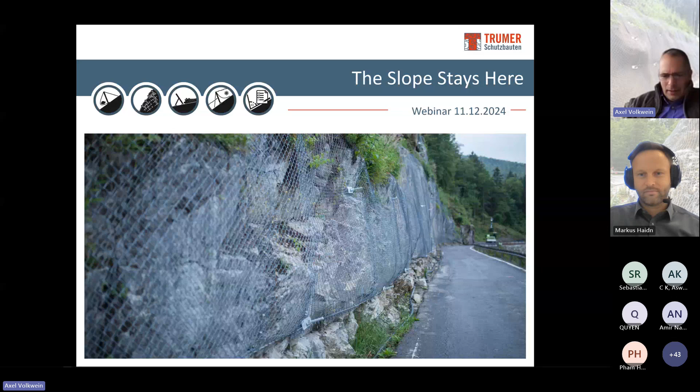Thank you, Markus, for the introduction. I think every participant in this webinar knows that an unstable steep slope can be secured by nails and flexible facings. Very often we can see the stabilization works also with shotcrete on the slope. But in our case, we are using the steel mesh. This is much more favorable in terms of greening, water flows, and it's also a very sustainable way in slope protection. So here we can see some example pictures.

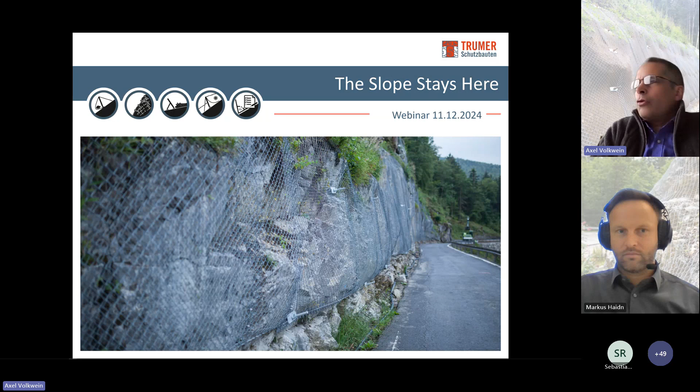Here we are facing a rock face, here it's a more grassy slope that has to be protected. Another example here, more a rocky face.

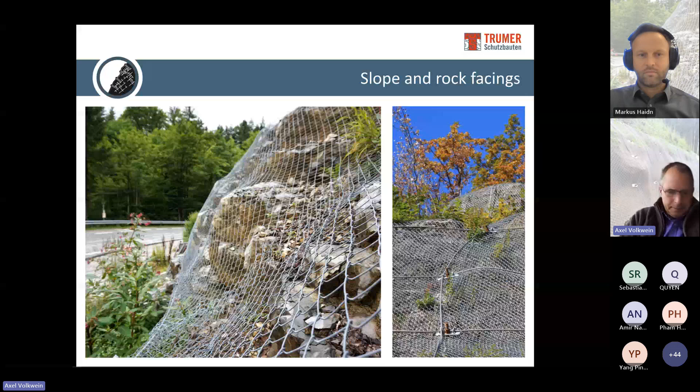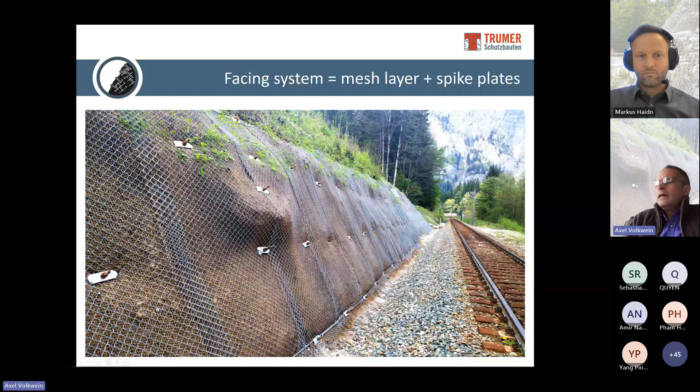What you can see is that these installations are usually a combination of a mesh and some anchor plates that are connected to the nails that go into the ground. So this is a system - we need a combination of a mesh and certain plates that interact together and guarantee that everything is stable. The mesh itself is delivered on rolls with lengths up to 30 meters and widths of up to 4 meters. You can also have smaller rolls, but usually these are the typical sizes of the system.

To secure the mesh also at the borders or edges of the slope, we combine our plates with certain mesh ropes, steel ropes, that keep the mesh on the slope.

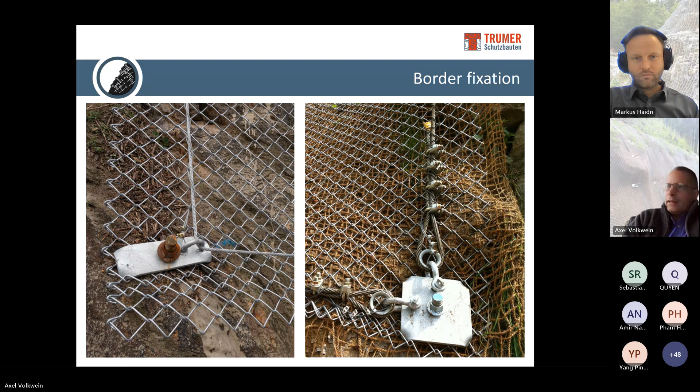The question is, we are using a product that is a civil engineering product, or for civil protection, and there is now a guideline that defines how we have to test and study or design these meshes.

This guideline came out in June 2016, but the origins are much older. In 2000, almost a quarter of a century, so 24 years ago, there were two civil engineers from Switzerland, called Rüegger and Flum, and they developed a calculation method to design these mesh facings along a slope. Based on these calculations, this European standard came out in 2016.

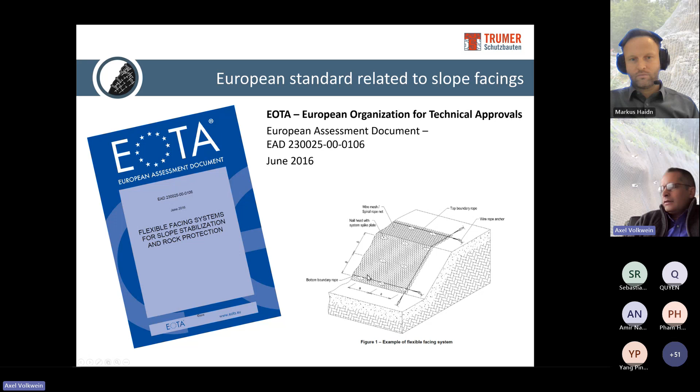So this guideline, you can download it for free from the internet, describes what these products are for. For example, here's an example picture from this guideline showing the slope protection. It also shows what details of a system have to be assessed for an official assessment or CE certificate by the European Union.

We have some geometrical values - this is the number of meshes in transverse and longitudinal directions. We have the mesh width, the height, so clearance of the mesh, so what size of particles can go through it. Then in section 3 of this table, there are relevant values on the strength of the mesh, and we will see afterwards in the webinar a little bit more on these values. This means how strong can I push on the mesh so that it doesn't break through the anchor plate, for example.

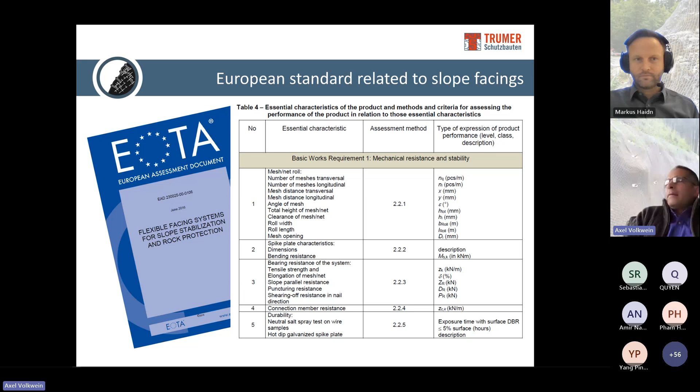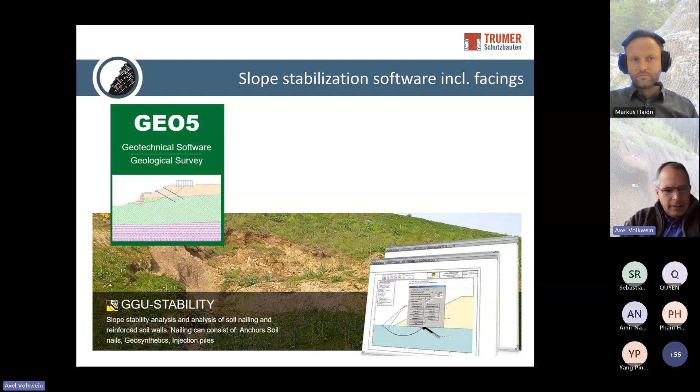To do analysis with these values, there's some commercial software available like Geo5 or GGU Stability - they have already implemented an interface to consider these meshes on the slope. But I think not everybody has a license for these two programs, and many other people are using different software packages like Larix or the things from Rocscience that provide all kinds of proofs for the groundworks, but don't have a special tool for the consideration of mesh facings.

To help these people, we created this free online tool for the design of mesh facings. We call it 'The Slope Stays Here,' meaning we don't let the slope go down. This web page is an open site, so everybody can use it - you don't need any login. The site just uses the calculation method that was introduced by these Swiss engineers 24 years ago. I think it's a good solution in combination if you use this tool with mesh systems that have a valid certification through the EU.

We will go into this tool later. It's very common to use mesh facings on the slope made of high strength steel, but this tool also considers standard meshes that are available in different strengths on the market.

So far, so good, Markus? Yes, okay, I see. Are there any other advantages of this tool?

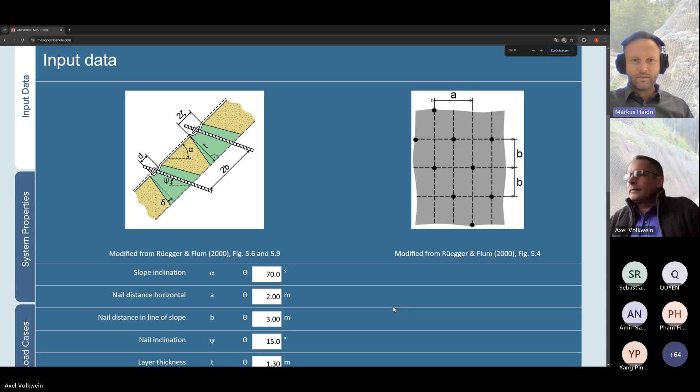So, okay, at the end of every chapter you find a red reset button. If you reset it, all the values you entered will go back to the predefined ones. We don't want to do that right now, we just save and proceed, and then the tool jumps to the next chapter.

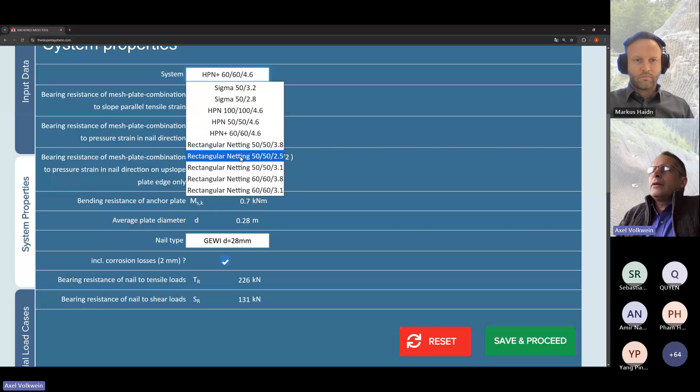And here you can choose the material you want to put on the slope, so you have kind of a catalog here. One mesh is called Sigma, we have HPN, HPN plus, and then rectangular nettings. These are nettings made from normal steel, it's not a high strength steel.

Depending on which system you choose, the characteristic stability values I showed you in the table of the European guideline are selected automatically. So if I change to Sigma, I get different values here, and if I change to HPN plus, I get other values too. These are chosen automatically. We are working on a version where you can also enter your own values in case you have a different combination of material, that will be a task for the next weeks.

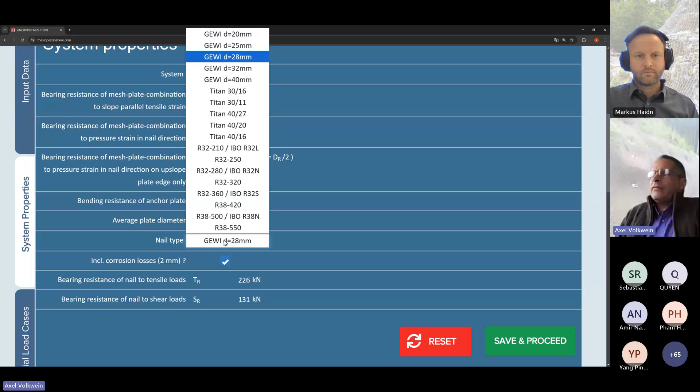You also have a kind of catalog for the different nails available usually on the market, and this catalog will also get its own section where you can enter your own values. You can also choose if you want to consider corrosion losses, so if you unmark this the strength values of the nails change accordingly. Save and proceed to the next chapter.

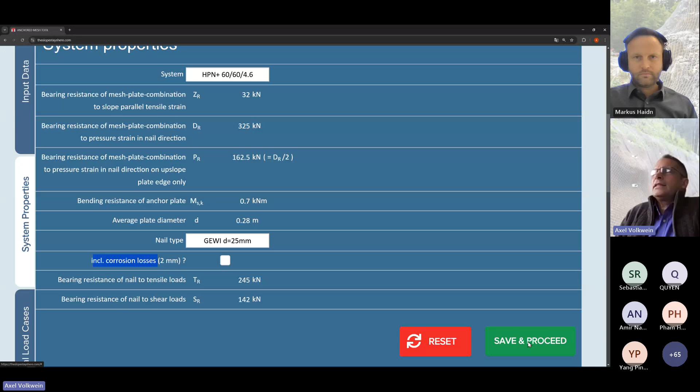And here we come to the section for what we need the mesh for. These are additional load cases that can happen, one is, for example, if I have to consider an earthquake. Earthquakes give an additional acceleration to the slope, and this additional acceleration or load has to be taken by the mesh. Here are predefined values: the Eurocode 8 defines, for example, in horizontal direction an acceleration of 0.175, and in vertical direction 0.085.

Maybe we have to consider earthquake, but we don't have to consider some slope parallel flow. It's a very dry area, we don't expect much water flow, so we can unmark this one here. Now save and proceed.

And now we come to the main part for every design engineer: these are the safety factors. Here we have some information at the top about how the systems work. For example, if I go into the Eurocode 7, the standard for geotechnics, it's written that the safety factor for friction angle is set to 1.0, the safety factor for cohesion is also set to 1.0, and the safety factor of density is set to 1.35.

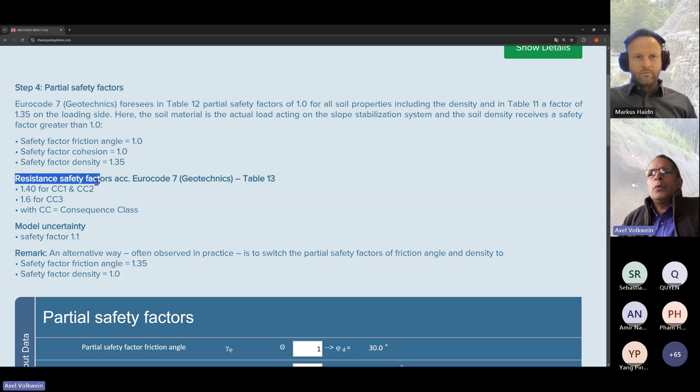In the past, there was also a model uncertainty factor introduced because it's still a mechanical model we use to design the slope. But if you trust the model very much, you can set this to 1.0, so you have no additional safety.

What we realized in the past is that these safety factors very seldom have been used exactly as given by the Eurocode. People just use the safety factor for the friction angle and no safety factor for the density. This is up to you. You have to show, as an engineer, which standard you use and which safety factor to enter.

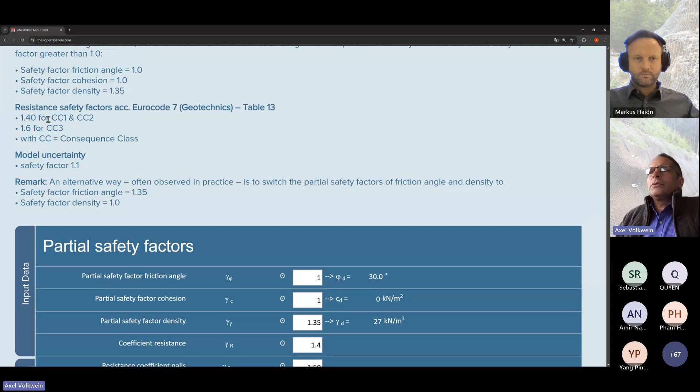We have an example here: no safety factor for the friction angle. Partial factor for the cohesion is also 1, but our cohesion was 0 anyway, so it stays 0. We have a safety factor for the density as given by the Eurocode of 1.35. Resistance coefficient for consequence class 1 and 2 is set to 1.4, and for the nails, in this case, we choose 1.5. Partial safety factor for model uncertainty we can also keep at 1.1.

Now we had entered everything, and the tool has to calculate the loads given by a sliding body that pushes on the mesh at the lower part of one row. But one question: how do you know the geometry of this sliding block?

Oh yeah, thank you very much, very good point. You're fully right.

We have one nail row up here and another nail row down here, and the part in between forms a sliding body. It's not necessary that the whole depth of the unstable layer is affected. Maybe it's only the upper half, and this angle beta might change. We don't know - maybe it's as large as this, covering the whole part. We don't know yet.

So the exact geometry - every single setup could create different forces pushing down on the mesh. This is the reason why we have a computer: it does 1,500 simulations in the background to see which sliding body produces the highest load.

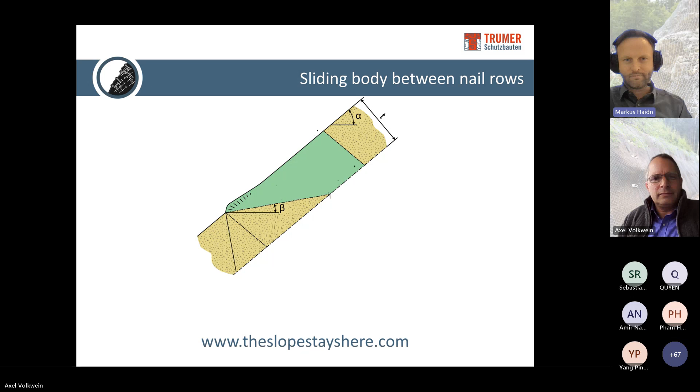Thank you for this question, that was very good to answer.

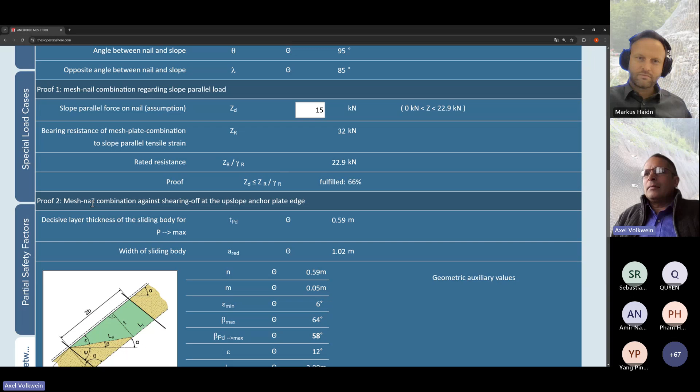All right, this is the point where we come to the calculation itself. We had the sliding body, and we covered the sections up to chapter 4. Now we have 2 remaining sections, 5 and 6, where all the proofs are done. Let me zoom out a little - here you find proof 1 and 2, and here proofs 3, 4, 5.

Wow, that is done by computer - there's quite a lot of verifications, quite a lot of proofs. So do we need all of them? Maybe you can explain them one by one.

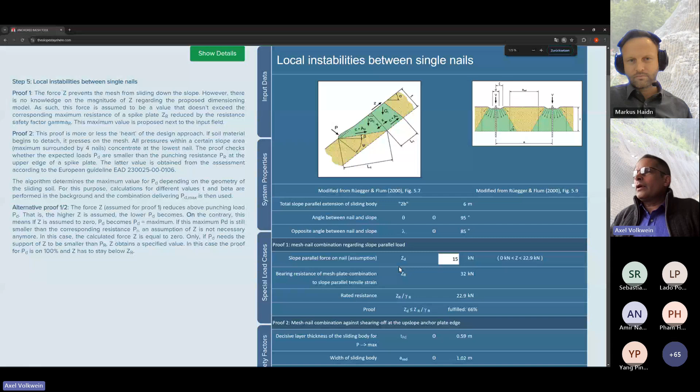Yes, you're right. These are the proofs developed by Swiss engineers some years ago, and there are different modes of failure that can happen. For example, if there's too much tension on the surface, the mesh might fail because there's too much tension at the upper nail. The mesh can be pushed through, or the anchor plate can be pushed through the mesh, and then everything fails. So the different combinations for the mesh, for the plate in combination with the mesh, and for the nails themselves have to be proven separately.

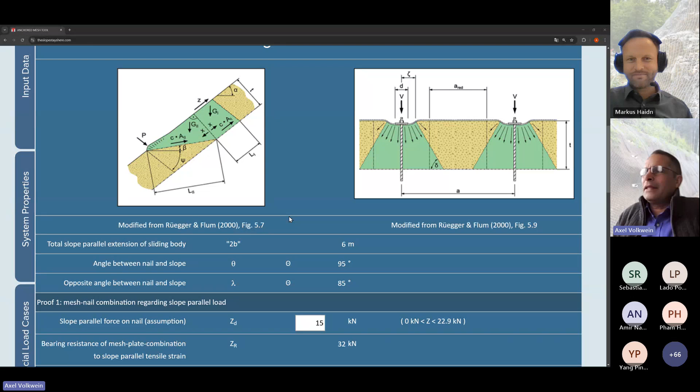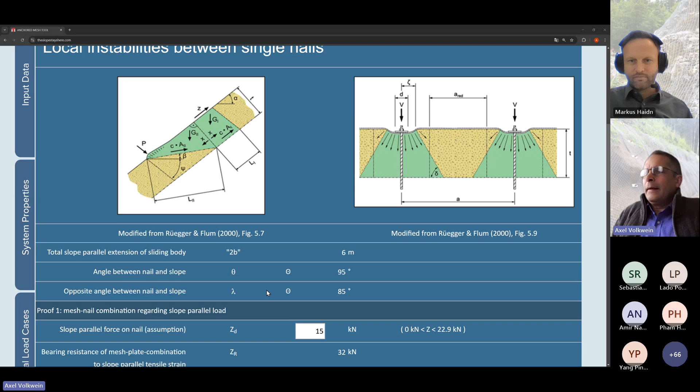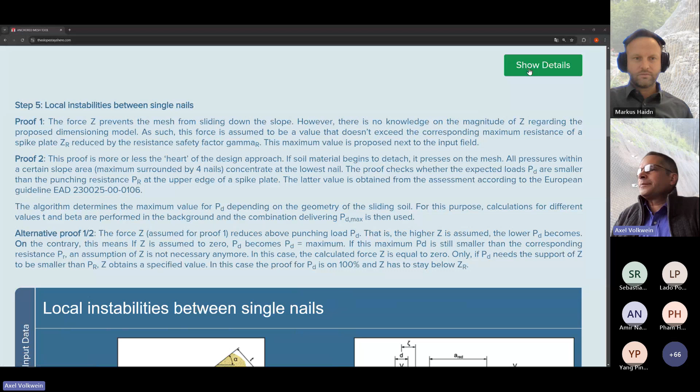For the first proof, we won't go into the details of all these single formulas - you can study them afterwards. If you look at these show details, we have 2 references you can find on the internet, where you can get all the theory also in written form. But you can also contact us to get this information directly.

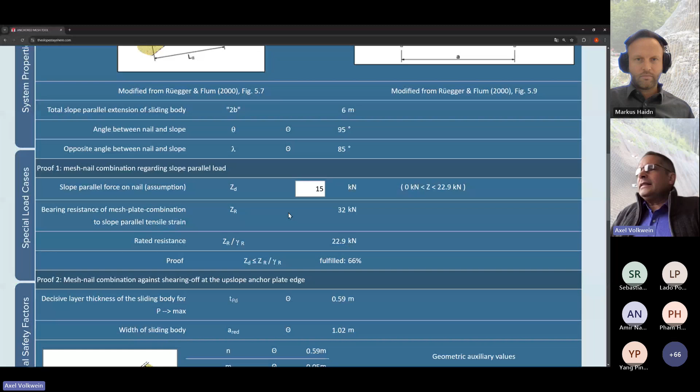The first proof says I have a certain amount of tension that pulls the mesh downward based on pulling on the upper nail.

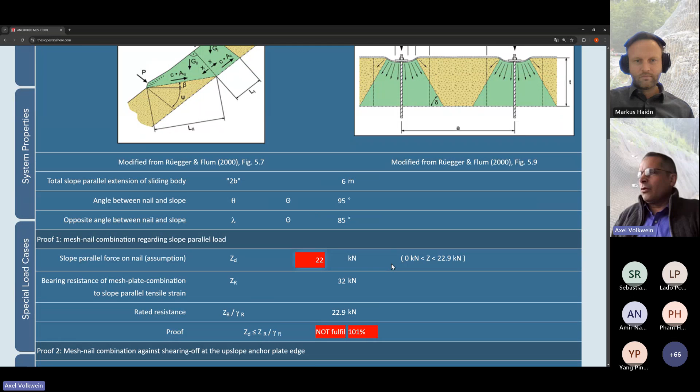Now it's interesting, the design approach says this force has never been measured in the field somehow, so we just assume a value. And then we prove that our assumption is smaller than the maximum resistance of the system. This is kind of strange, we know, but this is a method that works now for 22 years and everybody seems to accept it. You find here in the brackets the maximum value you can enter. For example, if I go to 23, which is higher than the value, it doesn't accept it. It turns to red, so we have to stay below the maximum value. This maximum value is clearly chosen so that it works with the resistance and the given safety factor.

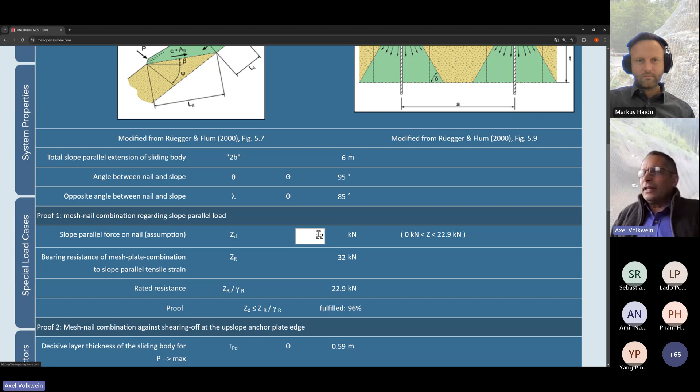So this proof 1 is fulfilled with 96% because we chose a very high value. Really, it sounds strange, we have to assume a value and show that our assumption is right, but this is the procedure given by the European guideline.

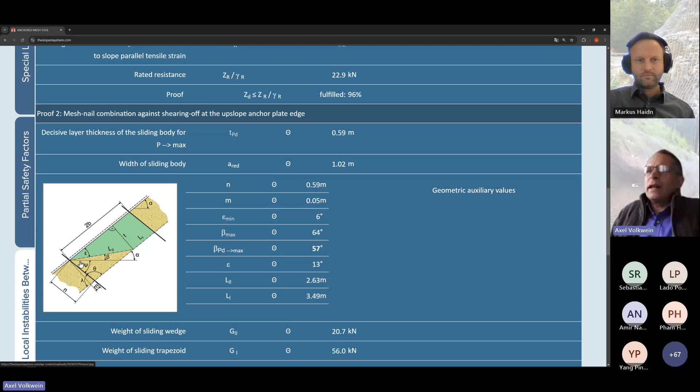The next proof, and this is the main proof, calculates that the load that comes to the lower spike plate is low enough that the mesh is not pushed, or that the anchor plate is not pushed through the mesh. This is the value where in the background we calculate 1,500 combinations. You can see here we entered an unstable layer thickness of 1.3 meters, and the critical value is 0.59 meters.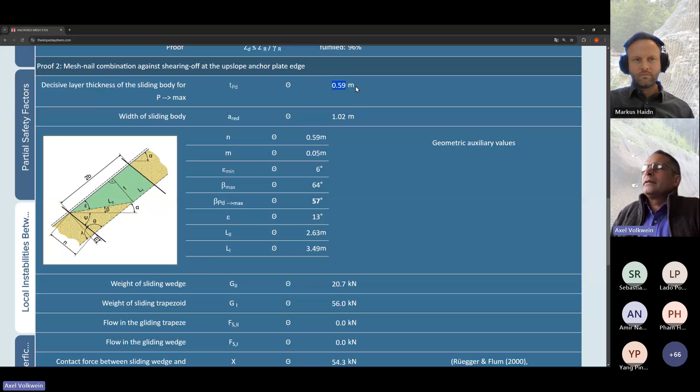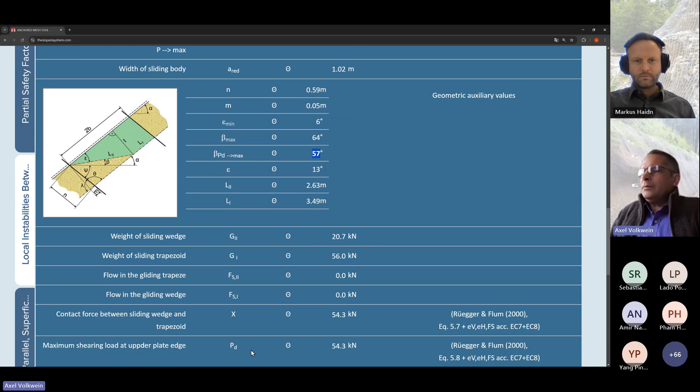We get a beta angle of 57 degrees, and for these values we get a maximum force that is the soil pushing the anchor plate through the mesh. We have the resistance side, and we have a safety factor. And then we see that we have this proof also fulfilled, and we use 47% of the capacity of our system.

So we now can increase the nail distance to go to the top, to have this proof just solved by almost 1.

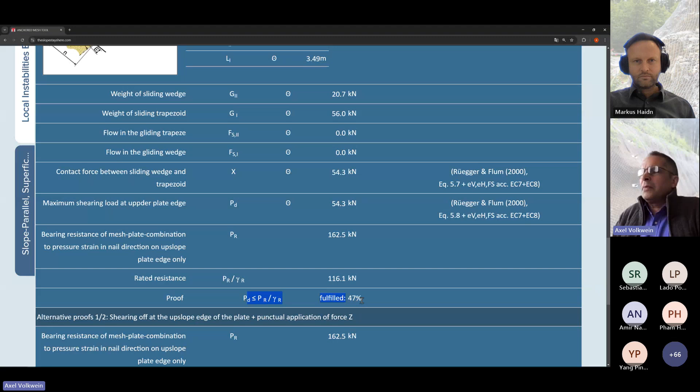So far, so good, Markus. Oh yeah, sounds very reasonable. I've seen there is one alternative proof right here below. Yes, what does it mean?

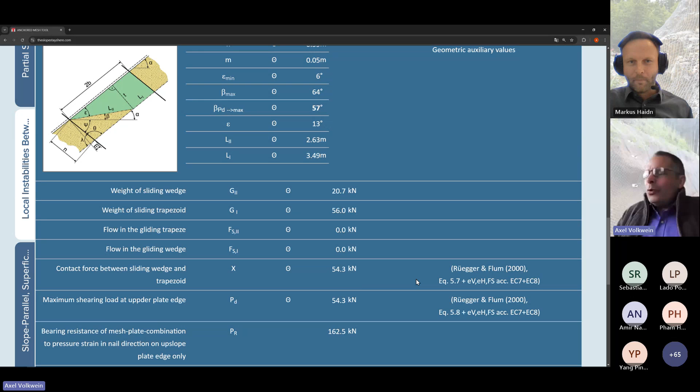Yeah, you're right, what you realized is that up here for proof 1, you have to assume a value for Z. Nobody has ever measured it or calculated it. So we try to get rid of this assumption, and we call it alternative proof because it's an enhancement to the existing ones given by the guideline.

The idea is, if I increase the Z value, then I get a smaller P value. Now the question is, what happens if I assume Z to be 0, a very small value? Would the mesh then still be able to retain the load coming from the P load? And if so, then I don't need further proofs, I don't have to assume any Z value. So you can see, yes, the system is capable to retain this value. So I have here 0 for Z and a maximum value for PD.

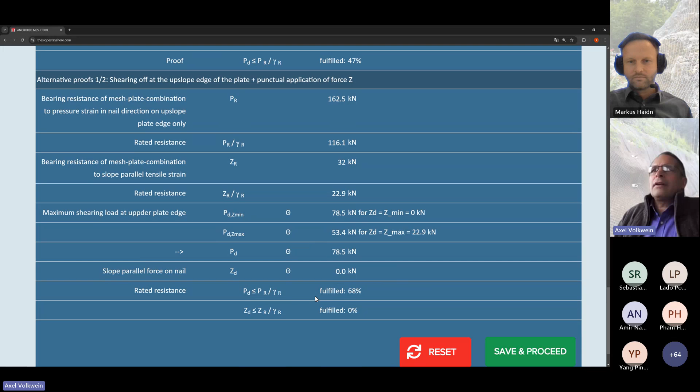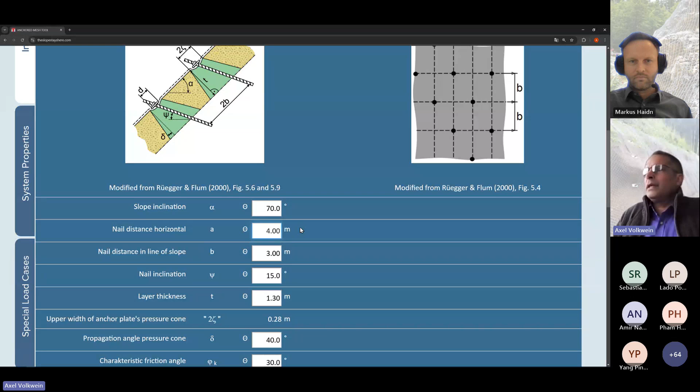Only if I would have proof 2 very close to 1, then probably I will need a Z value. We can have a short try. For example, let's make the nail distance much larger, so we go for horizontal nail distance of 4 meters. Let's see what happens then. Maybe it's too strong and the proof won't work.

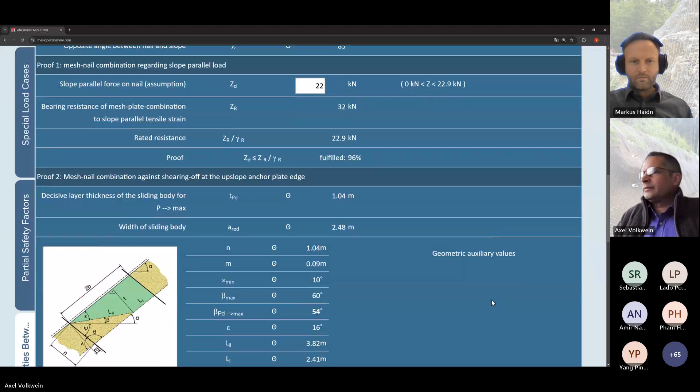Oh no, now we are too strong, we have too much load. And also the alternative proof doesn't work. But what you can see here now is if the system realizes I have a very high PD, then the system automatically chooses the maximum Z value, which is 22.9 as we just saw, and tries whether the proof then works. This is the difference here. So proof 2 is not fulfilled, it's at 210%, so we have too much load on it. The Z value reduces the load a little bit, not very much, but it tries to reduce it.

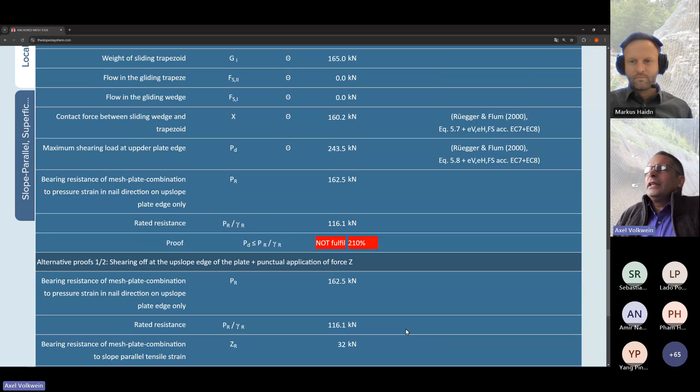So for the engineer to use it, you can go with proofs 1 and 2, this is according to the guideline. But when you're lazy, and maybe the future brings us that these alternative proofs are also valid for the officials, then you can just go with the alternative ones and ignore the upper ones.

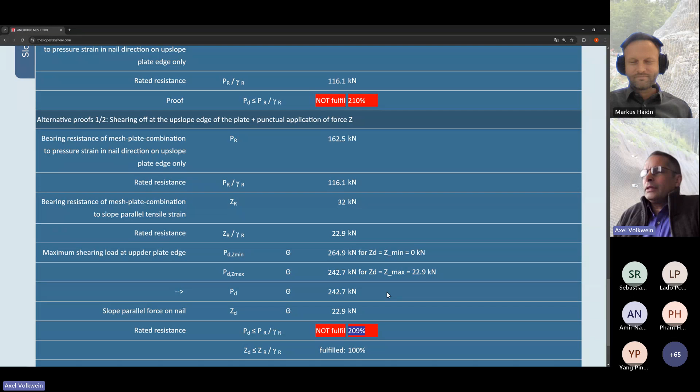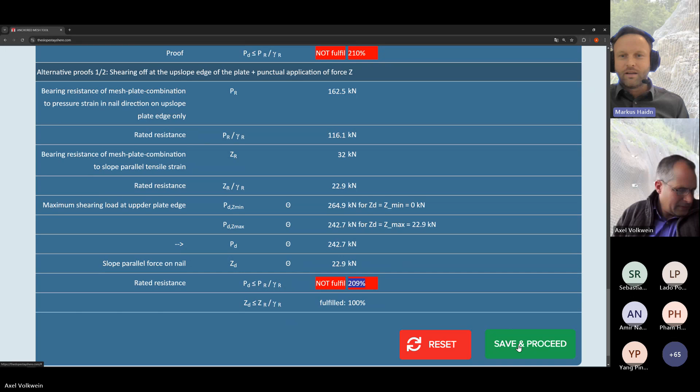Okay, seems not easy, but maybe we will need some more time to fully understand and practice the tool, use it more often. Yeah, maybe there will be some more questions in the future also from our participants. So can they contact us on questions? You mentioned you have an email in the tool where they can send us some questions, right?

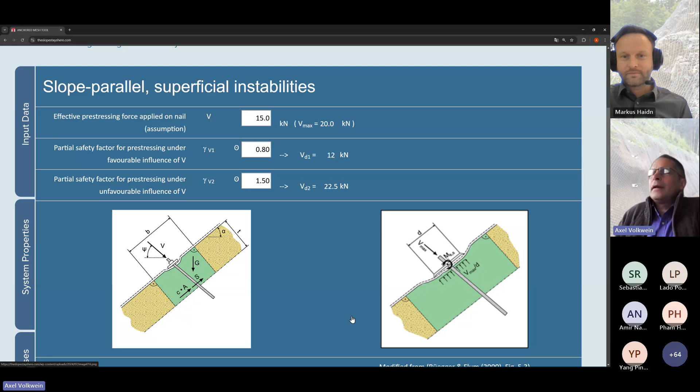Exactly, and also after this webinar, maybe we go quickly through the last section with the other proofs. We won't go into detail, I think it takes too long. We now could adjust, for example, the distances between the nails, or we choose a different system as a whole to fulfill all the proofs.

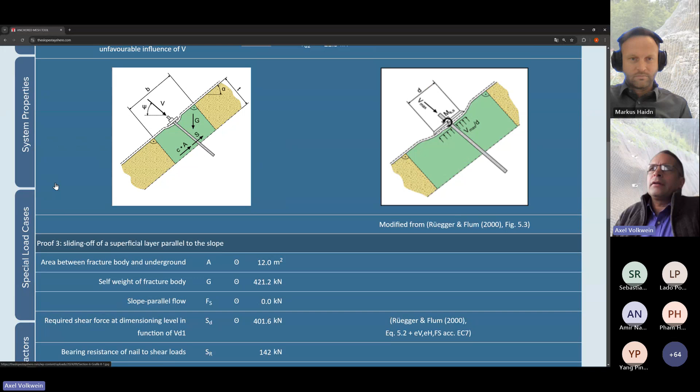For example, if you go to system and we now choose these, maybe let's take Sigma and see what happens, whether other proofs are then solved or not.

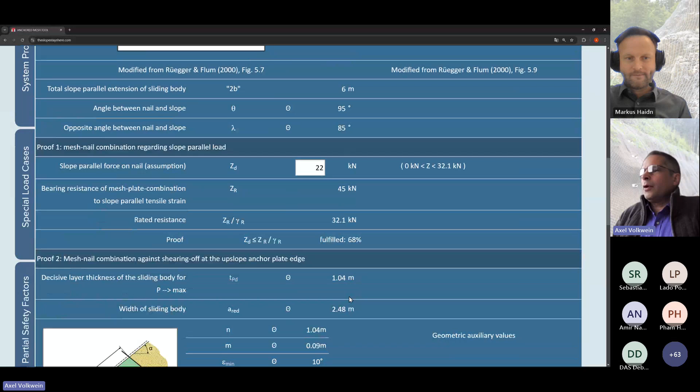Most probably you will have to reduce the anchor distance. Yes, we are a little bit better now, but not fully enough.

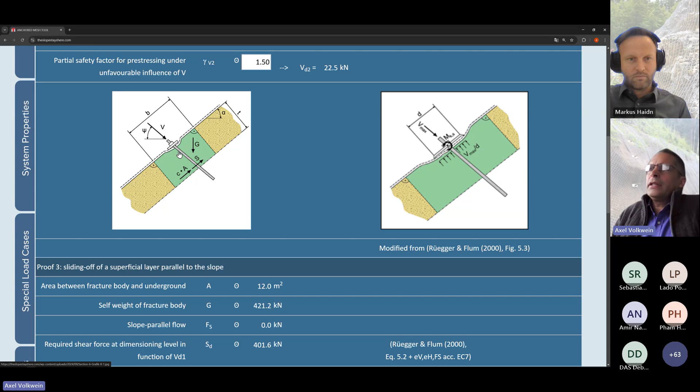Let me show the final proofs relevant for the nail. When I install the system, I push the anchor plate with a screw on the slope into the ground and apply a certain pretension. This pretension is also to be chosen by the user. Typical values are 1 ton per nail, for example, which is about 10 kilonewtons. Here we give a hint what is the maximum value for this pretensioning, given by the bending stiffness of the steel plate. If I push the plate too much into the ground, the plate will bend over. So keep this pretensioning below the maximum value, and you can calculate it.

Of course, this pretensioning needs other safety factors, since it has some positive and negative effects. So you can have a relieving safety factor of 0.8, and load resistance we chose 1.5, as we did before. If you click on the images, they will also enlarge.

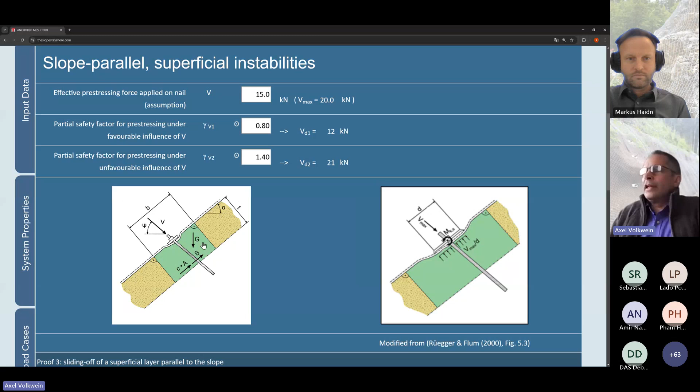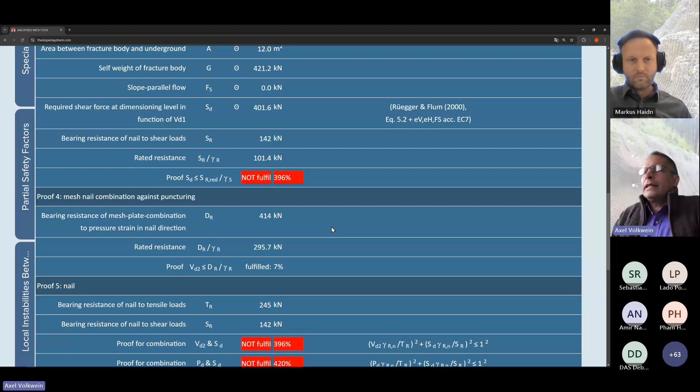So we get here the proofs. This is the sliding of a superficial layer parallel to the slope, meaning the nail has to suffer a certain shear load—this is the proof for the shear load. The next proof is the combination against puncturing: if I pretension the system too high and get load from the soil, I have to prove that everything works. This is luckily a good one in this case.

For the final choice, we have to prove the single nails. It's important that we have different combinations: shear and pretensioning, and shear and pushing load. The formulas are written here on the side for the proofs.

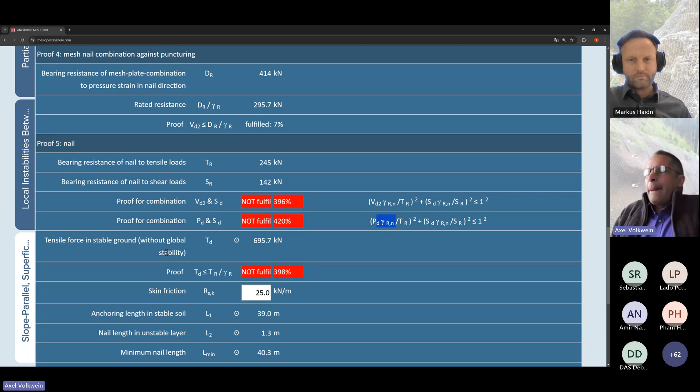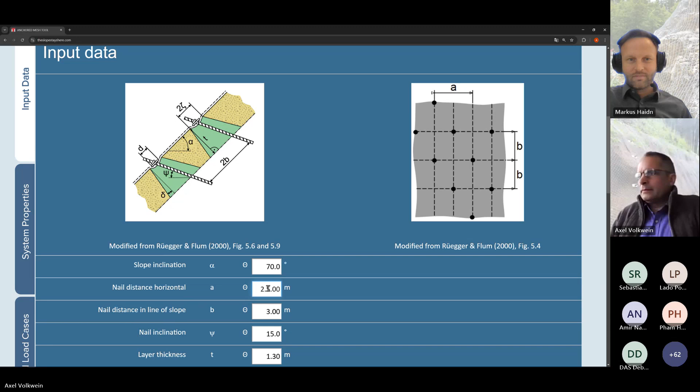Doesn't look very nice if everything is red. Let's change to a stronger nail and maybe make the distance between the nails smaller. There's nothing red anymore—perfect.

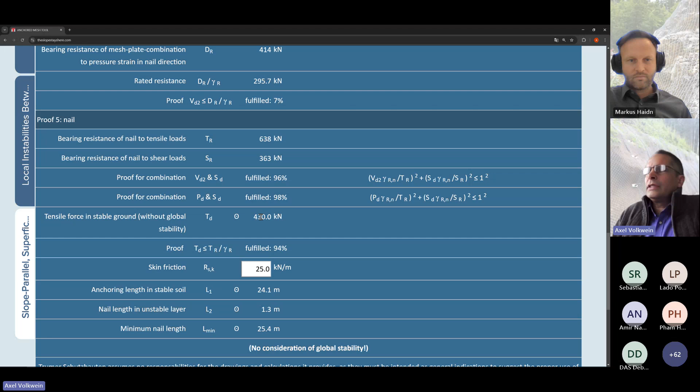In the end, we get a proof for the nails that are very well used, 96%, 98%. And then we get also the tension load for the nails, which you can use to design your nails and the nail length in the ground.

So far, all the proofs. Right.

So all these verifications seem to rely on one unstable layer, the top layer of the slope surface. So what about the global stability? Is it also considered?

Very important point, because we really stay with a superficial slope protection. We don't go into the ground because we don't know the situation in the depth. So the engineers have to use standard geotechnical software or calculation schemes to prove the global stability. It's also written down here—we have no consideration of the global stability. It can be that the global proof of stability requires thicker and especially longer nails to retain everything, so keep this in mind when using the tool. There's no proof of the global stability of the slope.

I see. Axel, to be honest, some of us have already used different tools like this called Ruvolum. Isn't the Slope Stops Here the same?

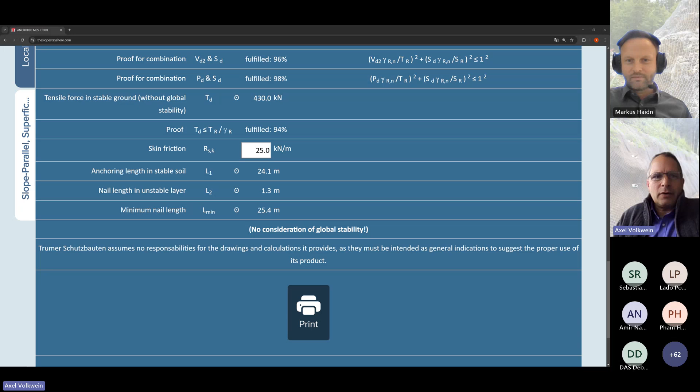Do we have time for some questions, Axel? Yes, of course, the questions could happen right now.

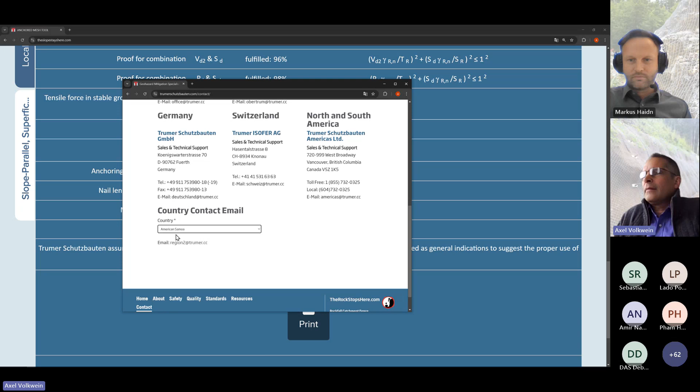All right, but if you have questions now, I'm fully open.

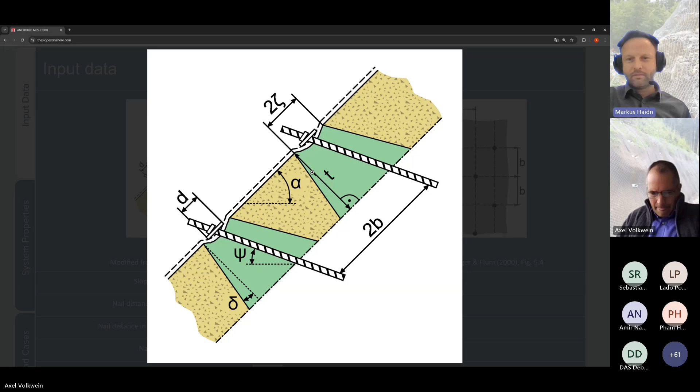Very good, one more question. The tool always mentions soil - what about rock faces, hard rock or similar? Can we apply it?

Yes, why not? Usually if you have a sliding body of soil, we handle it as a single mass in the code. We don't handle it as brittle blocks or small particles that form, but we keep it as a rigid body, and this would be the same for rock material. Another point is that rock material needing a facing is usually already very brittle, or the erosion is quite strong, so you usually don't expect large blocks to be activated.

So it works for rocks as well. We are preparing an alternative proof for the future that focuses only on rocks, but so far you can use it for both. It has been shown over the past more than 20 years that the calculation scheme works for both applications.

Okay, thanks, one more question. There's a question about how we can order material directly out of the tool, because some users may know this from our TheSlopeStaysHere tool, where you can submit your order or request. Can we also do this here, where they do the verification and then click a button and we receive the request for an offer?

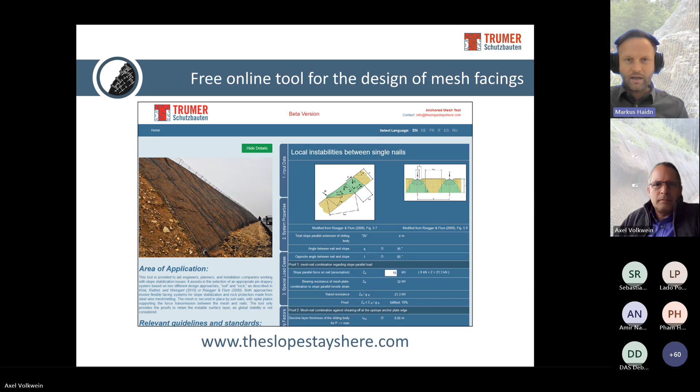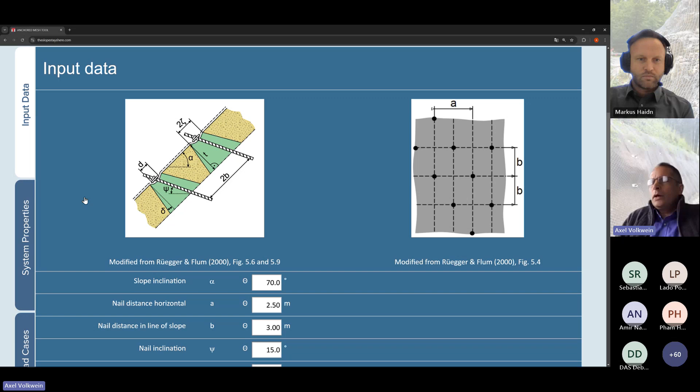One final question: can I get information on necessary nail lengths? You mentioned this in the verification, I guess. Yes, it's the very last part of the tool. Go to part 6 - we calculate the tension load that can at maximum act on one single nail, and then you can enter a certain skin friction.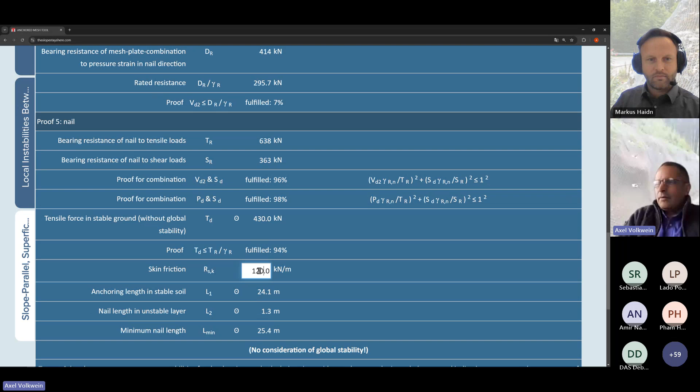If you drill into the ground with, for example, 90 millimeter holes, and you know the skin friction along the borehole per running meter, the tool gives you the possible nail length. In this case we have very high loads, so you would need to drill 25 meters into the ground - this is not a realistic example, and the skin friction is also very low here. Exactly, yeah - as soon as we go to good rock face values, we end up with much more reasonable lengths.

And this length calculation takes into account the anchoring length in the stable ground, plus the anchor length in the unstable soil layer.

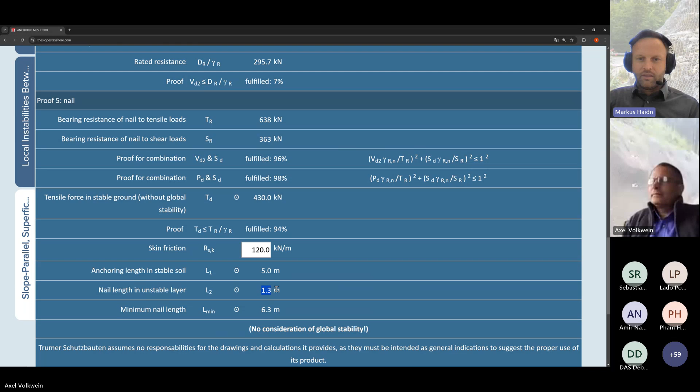Okay, thank you very much, I think we will end it here. If there are more questions, I think everybody knows how to contact us. We are happy to receive feedback on this tool or ideas for other additional applications.